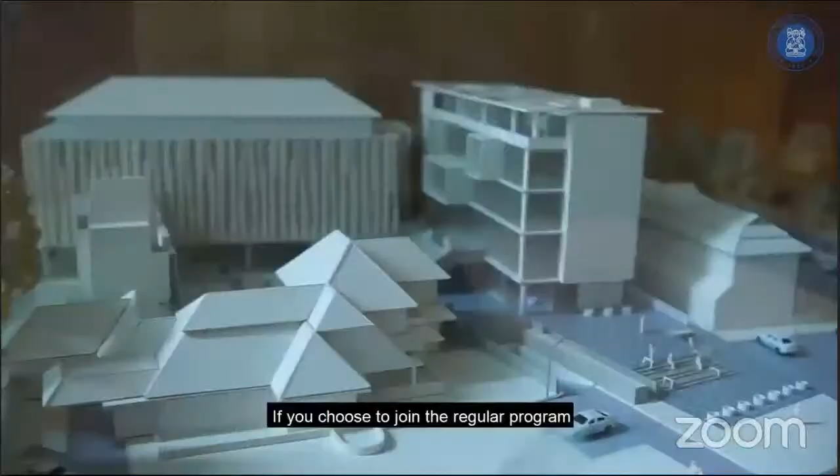Students can choose to join the regular program or the international program. If you choose the regular program, you will receive courses in Bahasa. You can also choose from six specialized programs, including regional development, urban planning, infrastructure and transportation systems, urban management, disaster planning and management, and innovation systems and smart cities.

If you are interested in joining the international program, you will receive courses in English. In the second year, you can choose to continue your studies at partner universities abroad through a double degree program, or continue your studies at ITB. We have collaborated with a number of world-class universities in various countries, such as the Netherlands, Japan, and the United States.

To support learning activities, we provide comfortable classrooms, library, multi-purpose halls, conference room, studios, and computer laboratory. Learning activities are carried out interactively through discussions, project works, and presentations, and are supported by events organized by the faculty, such as the International Joint Studio, international summer camps, student exchange, guest lectures, international conferences, workshops, and field trips.

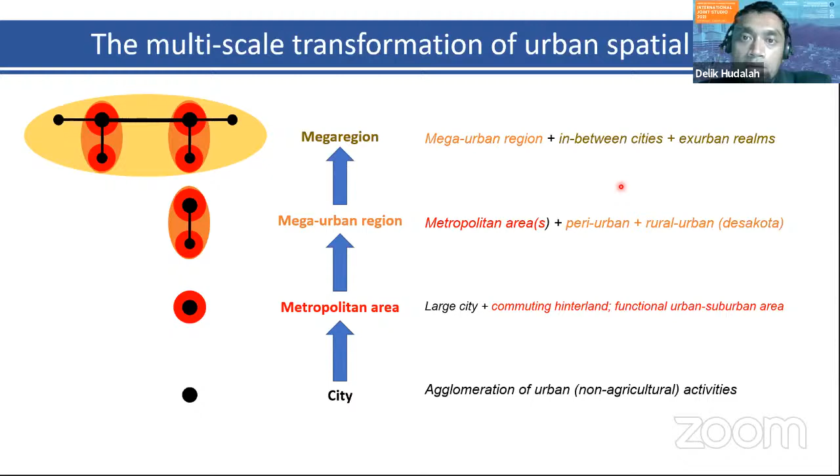In Germany, sometimes they call it Zwischenstadt, cities in between, or in some US context, it can be ex-urban realms, where new urban forms are really very much in no man's land, somewhere in nowhere. Urban transformation in surroundings which are nowhere, when compared to other urbanized locations, is very far away.

First, maybe trying to be... it seems like I have spent 15 minutes already, so I have to be rather quick.

For metropolitanization, we're talking about the city surrounded by the suburb, where the issue of satellite towns, large-scale residential estates were quite evident, along with some commuting issues and basic services. In terms of planning, basic services issues or inter-local government coordination were very much visible.

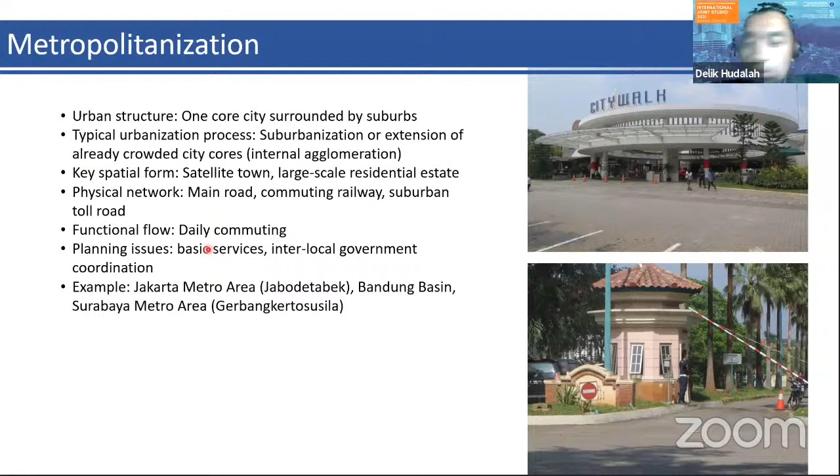While in mega urbanization, there has been a kind of unplanned mixture of agriculture and non-agricultural functions in some densely populated villages. It's like dealing with the mixture of agriculture and non-agricultural function, and some sprawling of industrial space, intercity railways, and quite a hot planning issue dealing with land use conversion in the fringe, and some issue of local economic decline or developmental issues.

And then coming into the mega regional issues, talking about mega regional transformation, it's quite an eclectic or complex process. Maybe it's kind of like chicken and egg, how mega regional space is becoming. But clearly there has to be some kind of global force and domestic forces.

For instance, some North American perspectives focus more on how the metropolitan networks are linked with each other through infrastructure interaction, so a more morphological dimension. And some cases in Europe focus on the relational dimension of intercity relations.

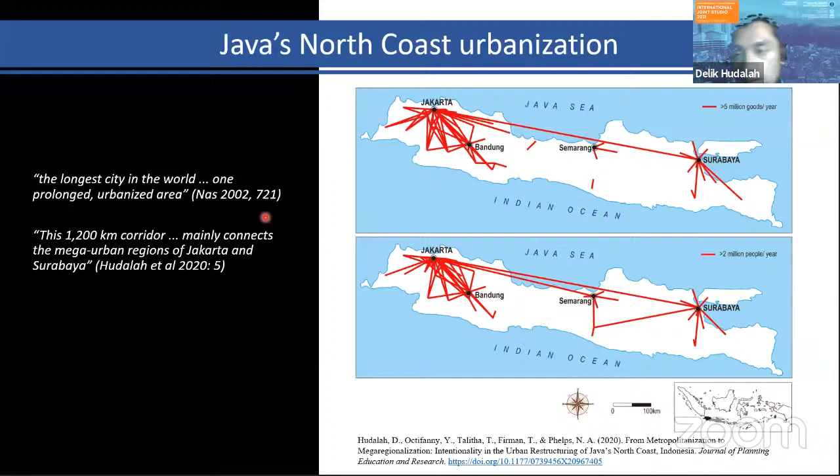I'm focusing on Java, where the most established urban spaces can be found in Indonesia. The North Coast, in some past studies, is considered to be the longest city in the world. So even before recent global competition, the North Coast of Java, or Pantura, is one of the longest cities in the world, a very long urbanized area of more than 1,000-kilometer corridor connecting the mega urban regions of Jakarta, Bandung, and Surabaya.

We also see that while this physical transformation can be tracked back through the colonial era, during the competition between colonial imperialism—the British, the Dutch, and others—regional infrastructure was considered a global security reason for defense. But now it's re-emerged that the transformation of this corridor also has to do with economic issues, including the competitiveness of the whole region.

And what the planning policy says about it is one of our focuses. We also see that while some phenomena are quite emergent features, there are some interventional factors behind them. What is interesting in the Indonesian context is if we compare it to a rather more strong state.

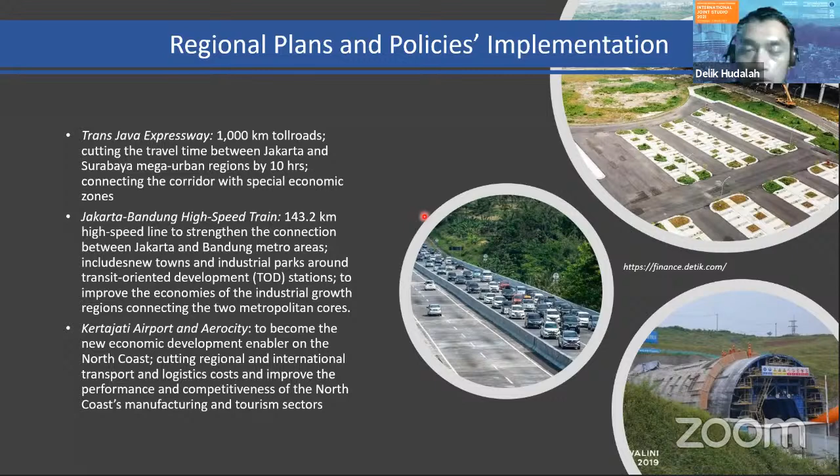Now we are also constructing the first high-speed train throughout the corridor. The first phase connects the neighboring metropolitans of Jakarta and Bandung, but from the ideas, discourse, and policy discussion perspective, it can or will span throughout the whole north coast until Surabaya. Also, some new transport hubs are being constructed beyond the peripheral areas of the large cities, in new locations, in empty space in some respect.

That is the new beginning of what we would see as a transformation of the urbanized island of Java, where all metropolitans or mega urban regions will be connected with each other, or are being connected.

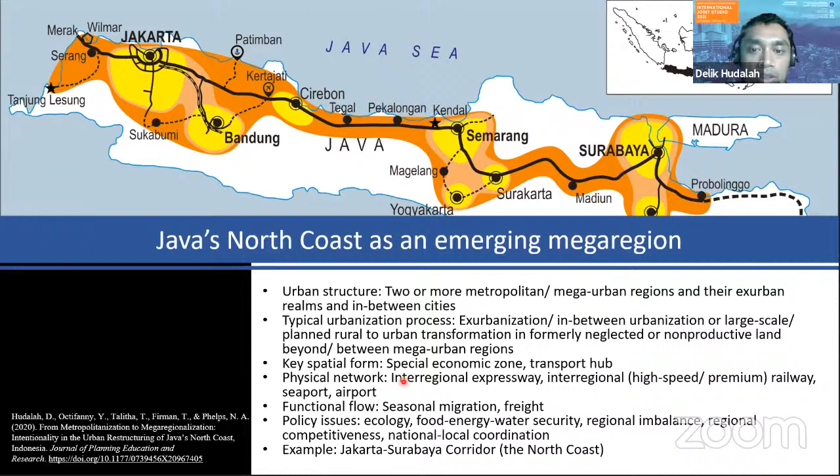The construction of transport hubs in new cities outside the traditional boundaries of mega urban regions is one of the emerging pieces of evidence that can be differentiated from before, along with some more specialized zones being constructed, and more freight issues rather than people mobility in some ways.

This is just maybe a beginning or preliminary study to see a new emerging phenomenon in Indonesia, with particular attention to Java.

Now we can draw some conclusions: there is an undoubted need to combine the spatial or physical environmental planning system with the sectoral or socioeconomic planning system.

It has been a lengthy race, in some ways, between these different policy fields, with periods where several policy systems were on the rise, and then later others took over. Now, in a period where physical planning is being questioned regarding its effectiveness in reshaping urban function, what is more important is the integration between these different policy systems.

We are also seeing that interlocal government and interlocal actor collaboration are not sufficient to really deal with the more complex and wider transformation of the urban area. And the central government is gaining importance.

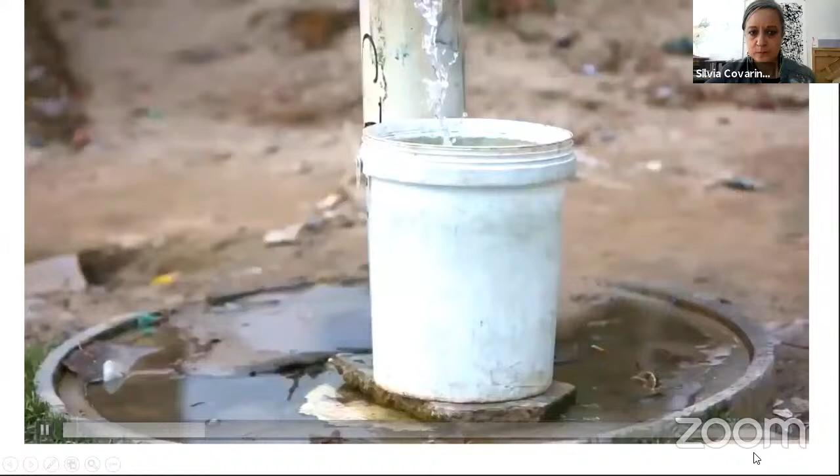We don't find toilets inside the informal settlements, so they have to use open fields or bushes, and that's where they get criminal attacks.

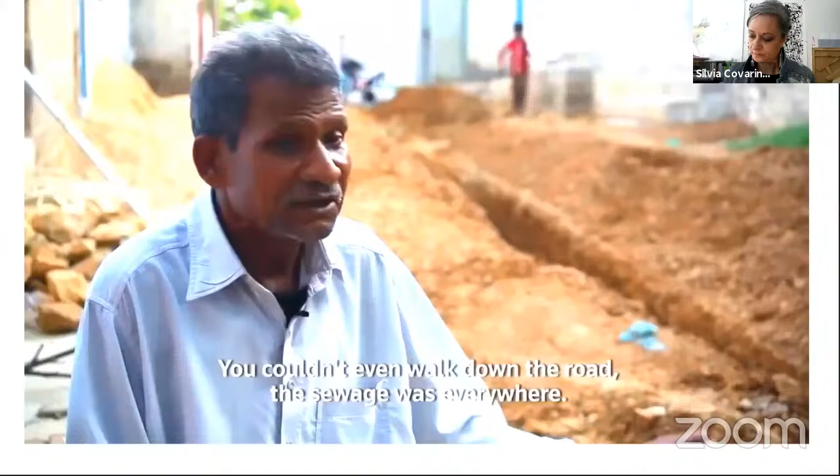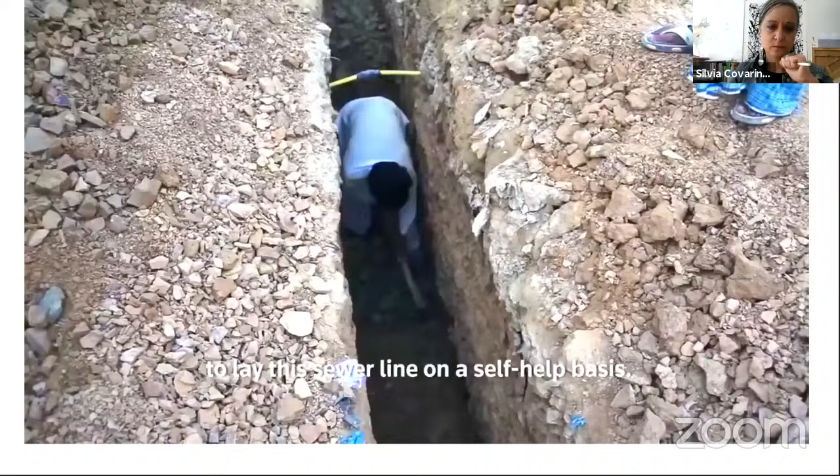The urban poor in our cities are the engines of the economies.

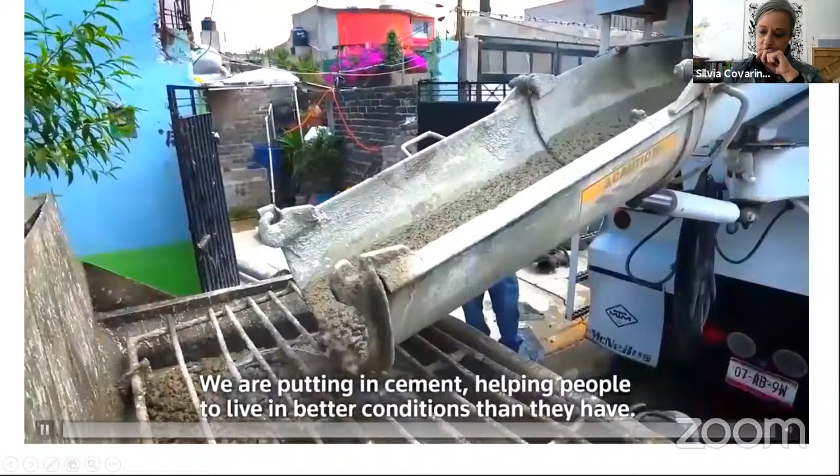This was the video we used at the beginning, because I forgot to tell you something.

The studio and the program to integrate the studio with housing come from a teaching group. We are working on four subjects - a studio at urban scale integrated with housing in four topics. In Cairo, one professor will work in a historical area, another in a new desert city, another in the middle of the desert.

My topic was to cover the general overview of the urban frame of Cairo and informality. This is why I decided to work a lot with the connection of global and local scale, to give the students an overview beyond the micro reality where we are working.

This is the video we used at the beginning to open the focus group with the students, and to coordinate the program of the two integrated courses, because housing research was behind the design proposal in the studio. The pattern of the density - let's continue to the global introduction - this is how we figure out the composition and organization of the settlement and urban form, behind how people are living there and the high concentration of people.

It's not only the form and the built form, but also the relationship with the natural environment, or with the topography, with the natural elements of the city.

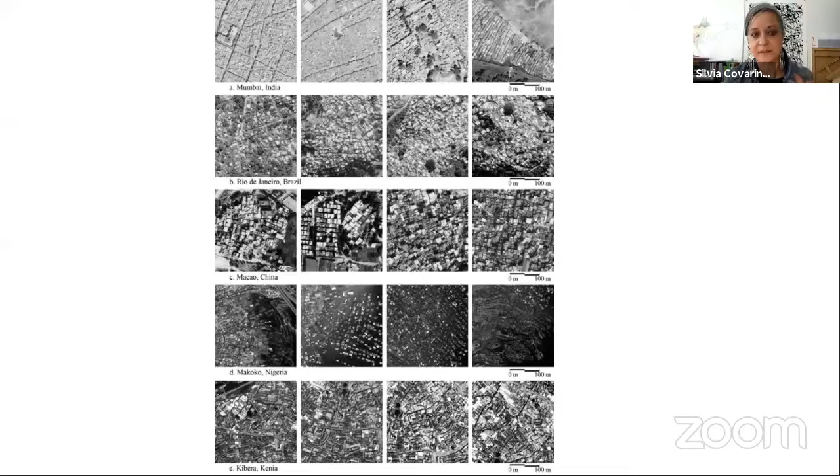Behind this urban analysis and physical understanding of form, there is a broader community - people living there - and there's an invisible urban living as a topic, because by simple definition, a slum refers to an informal settlement in an urban area that is very densely populated.

This is the classical portrait of the living condition: the problems in the habitat, the low condition, the problems in infrastructure - especially basic services for the community - and the social right of people to live in a very good condition.

This is a quote, a motto so to speak: 'if you've seen one city slum, you've seen them all.' But it's not true, because each reality has a different connection with the particular context where it sits, and the community is always unique.

We start to work with the students using an approach based on keywords and visual perception. Through keywords like service, hygienic condition, and transportation, we open up the global scale to them, and we ask them to submit a certain number of photos to work with through images.

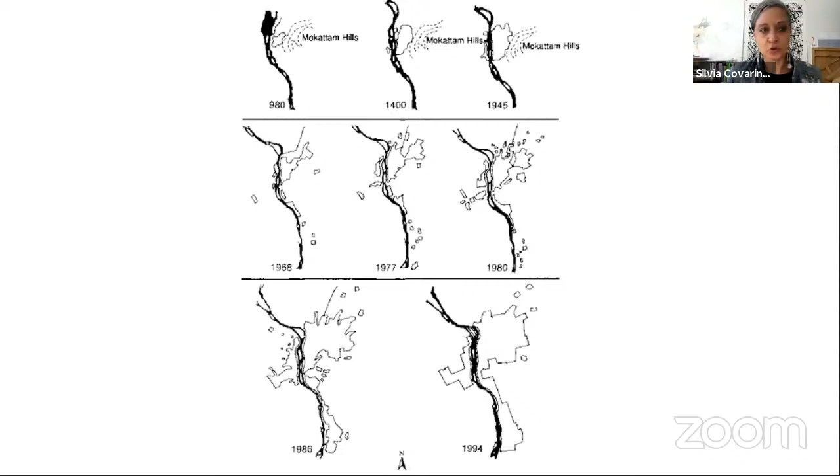Looking through recent time, the built-up area of Cairo, with some overlapping from 1950 shown against the gray layer of the current situation, shows the impressive, aggressive increase of the gray area over the last 40 years, and the vision for the future.

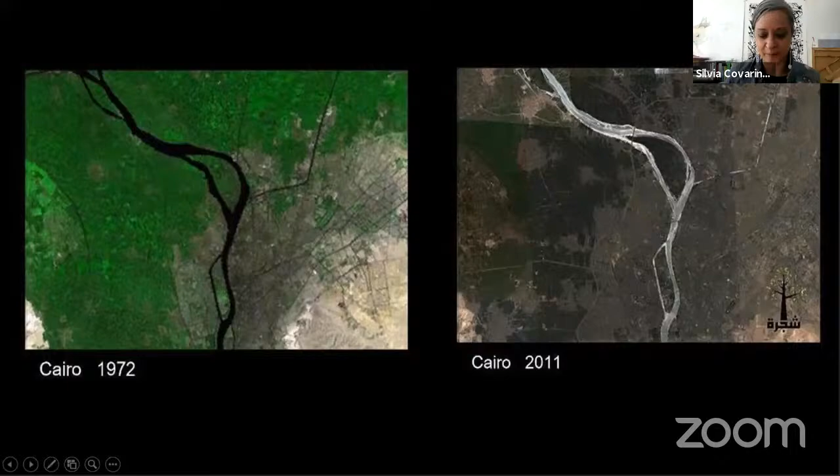The presentation from my colleague before, Professor Delik Udala, sorry for my pronunciation, really impressed me through this study of the connection and discussion of the very large regional planning, because basically here in Cairo we are facing the new capital.

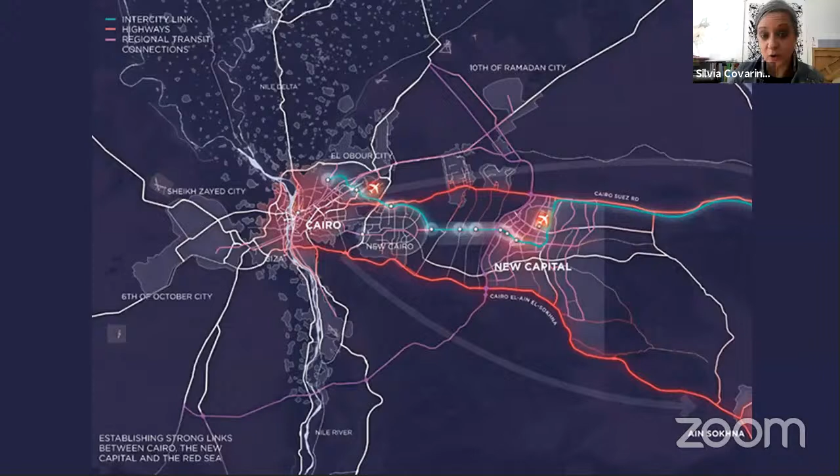We had New Cairo and the issue of the desert city, and now we are moving to the new capital, and it's a very similar thinking and vision for the future.

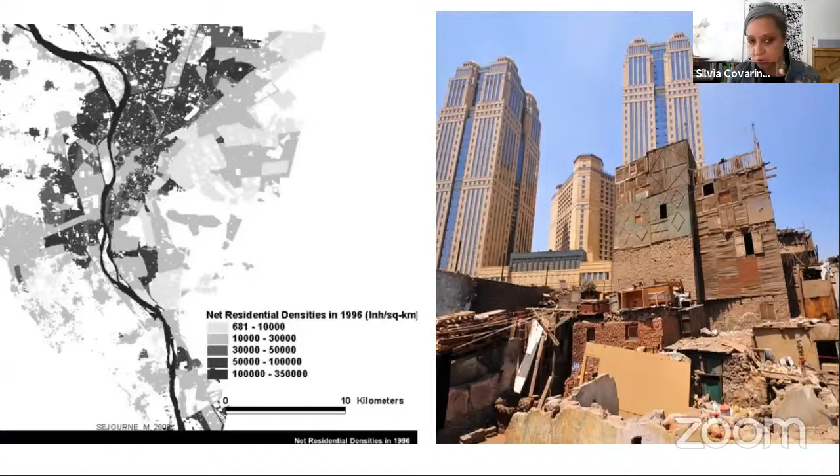As I mentioned through this study, around 70% of the inhabitants of Greater Cairo are in informal settlements. As I mentioned before, this uncertain data is an issue to contain and manage.

To figure out the portrait of this area, there are more or less three important components: the former desert land as the newly developed city, the historic core of the city where several settlements exist in historical Cairo, and the urban pockets running around the development of such housing programs.

A very good reference is this study from GIZ published in 2009, which provides a good background to understand the development and increase of this dynamic, with certain data through maps and experience to consider. And this is the core of Cairo.

There is some data regarding the issue of housing, how it's running, and the scenario in Egypt about the construction of housing units by sector. This data covers a 10-year period.

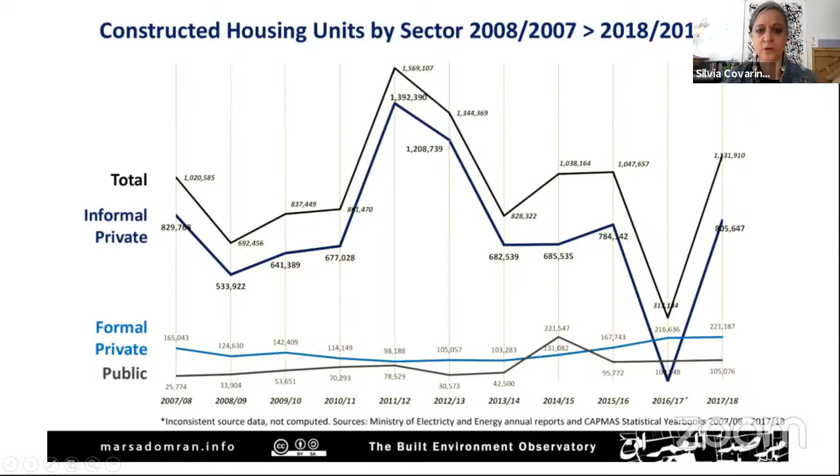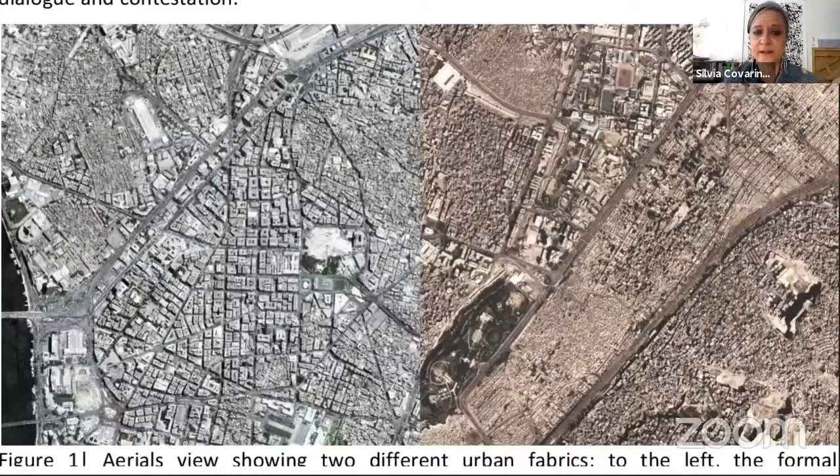The reality of the chain of the city, the public space, the informality in terms of the micro-economy too. This is a picture from the city, a very interesting context behind the border of our site, and the temporary and mobile informality in street life.

This is a brief summary of the garbage city, Manshiyat Naser, the area and surroundings where we work with our students. We are located behind the Mokattam Hill on the border of historic Cairo, very close to this important slum and a very large cemetery area.

The dynamic is more or less the same: it attracted people through the large movement of immigration from rural to urban areas. This is related particularly to the issue of recycling, and the micro-economy is there because of the connection with the Zabaleen, the garbage collectors. This is why it's called the garbage city.

This is an overview from half a century ago of the area and the hill, then the first development, the initial built area, the aqueduct, and an amazing landmark of Mamluk architecture in the area behind. This is now an overview of the citadel, and the City of the Dead with a nice element of Mamluk architecture, the first developed hill, and the area behind it.

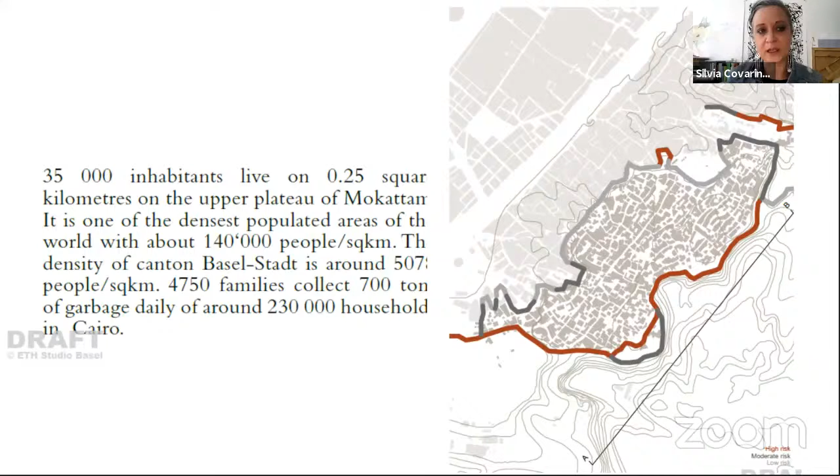This is a map of the risk of the area. The red line shows the very high risk related to the aggressive construction behind the hill. Unfortunately, in 2008 a huge disaster happened, and many people died. This combination of risk is very important to consider.

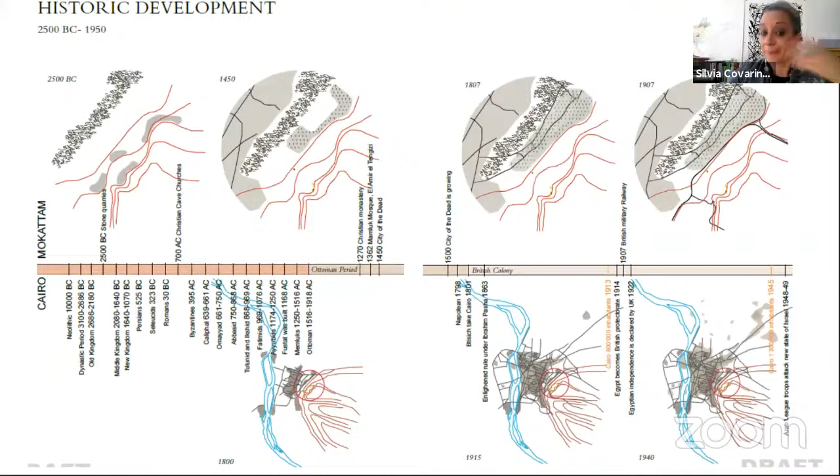This is the historic development of the area through time and how the urban growth happened. This is a kind of plan and intervention from the government, part of the 2050 plan, but it has not been realized yet.

More data, more reference about the area, how we are going to read and understand it: the combination and the border, the topic of infrastructure, the story of Cairo, the topics of risk and the marginal border with the topography, more and more close, the urban texture behind, how the different areas work, the impact of the autostrada, and the aggressive infrastructure there.

The special relationship with the hills, because there is an important heritage to consider. This church in the cave is a quite unique and interesting element in Cairo. And how is this relationship with the natural element too?

Such services are there in the area. I try to translate for you from the Arabic: the church, the housing, the environmental institution, the Sunday market, the entrance. It's very well connected with the autostrada and the surrounding area. The impact with the topography, the reality of the informality in the Sunday market, the condition of the built environment there, the reality inside the little void in the informal city.

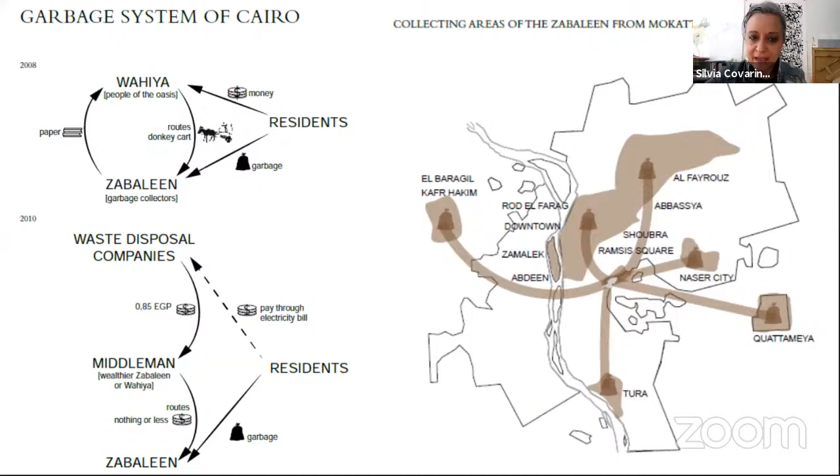It's such a really important dynamic behind the way they are working and living in the same area. And now, how the housing typologies work was very interesting for our students to think about - how in the same physical space they are living and working.

How is the dynamic of the building? How is the dynamic in the street? And by the time - this is a very interesting study we found ready, by the way, it was very useful for us and also for the students to think about the proposal - how this relationship works with the street space and inside the building, and the circuit through different times, because it's a very active and dynamic community there.

Of course, the garbage city is a very interesting case. It's a unique slum, let's say slum or shantytown, however we would like to call it. And it's interesting for anthropologists, it's interesting for photographers.

It was the site of a public art project, a very famous set of murals, to give visibility to them, and this included the participation of the community. It's also very interesting for the sociologist and for the photographer.

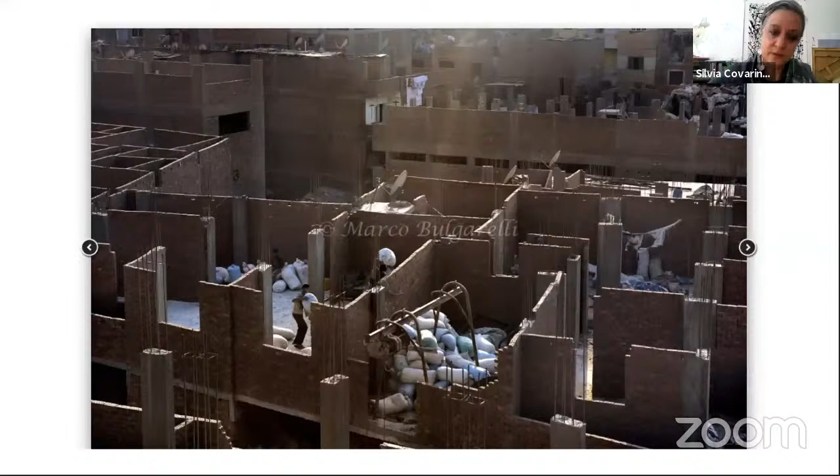This is a very interesting work from Marco Bulgarelli, and I picked some interesting photos. It was looking really inside their life, and showing the huge impact - the environmental impact of living with this garbage and the contamination in the street, a very dirty place, by the way, and a very high risk for the health of the community.

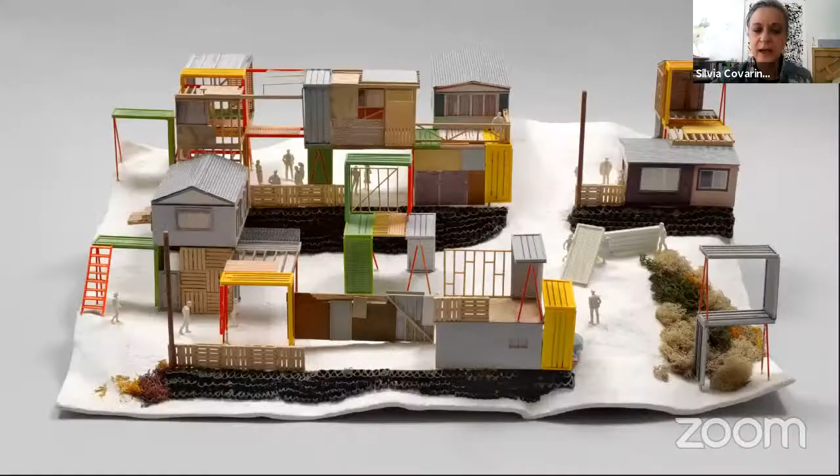Well, what we did with the students was our approach, a design and research approach to reading informality. First of all, we focused on designing for people - as designers, in love with form and with the plan, but we tried to really highlight the social aspect, and consider sustainable design, participatory design, sustainable architecture, and maybe self-sufficient solutions for them.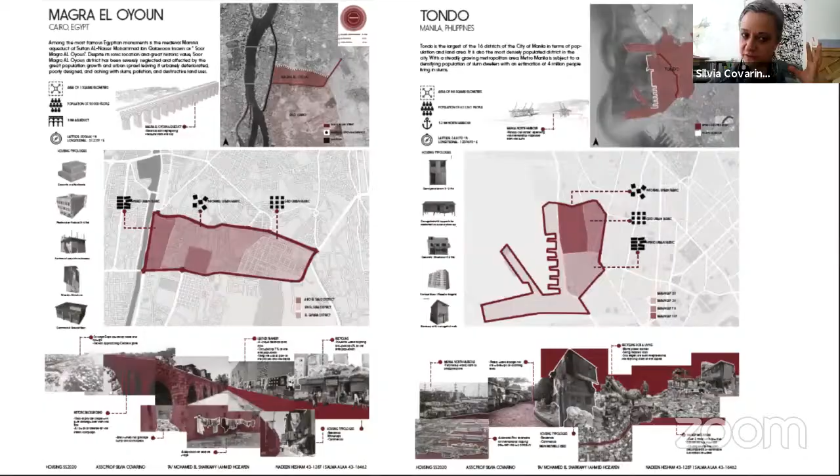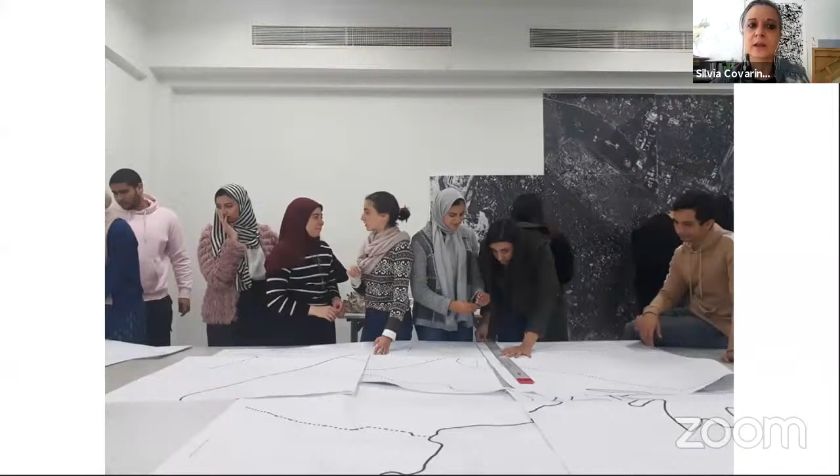Then we went through the urban analysis, using the impact of the first video presented in the lecture today, and visual perception and mapping. We tried to work with a cognitive map. We prepared the students with a large map, taking careful consideration of the border and surrounding area. We also worked with the model, in progress. Then we gave them a task to work with keywords and images.

This is the result that came out from them at the beginning, as an impact and impression after the visit. For them, of course, it was the first time to visit the area. We prepared the visit, going there with my TA a couple of times to prepare all the routes and the map, and tried to connect with some locals and facilitators of the community. This is how the reflection of the students over the impact of the visual experience there came out.

And then we worked through the map. It was very interesting, the interaction also with the community, very friendly, very nice with us. This is the summary of the urban analysis, the environmental aspect.

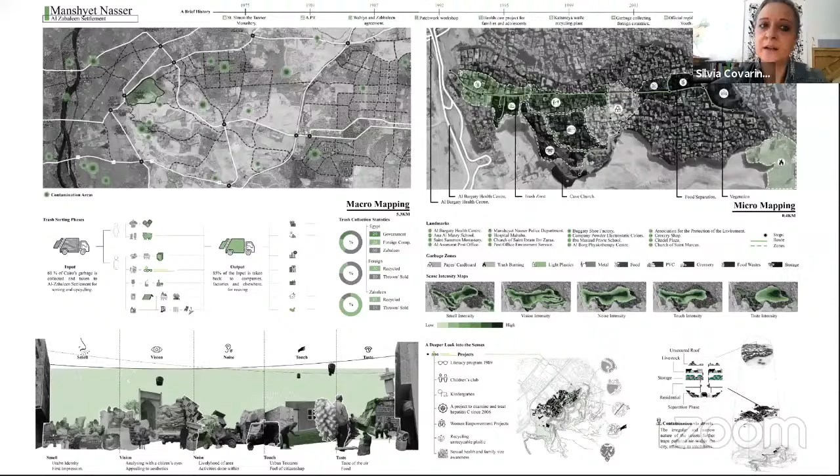The social aspect, how the community works, how is the connection inside the settlement and behind the border in the district, and also with the city, and the economical aspect and the social issue. This is an amazing section my student developed, showing the interaction and impact with the network of the city. Then we came out through the keywords to figure out the problem, in three important aspects.

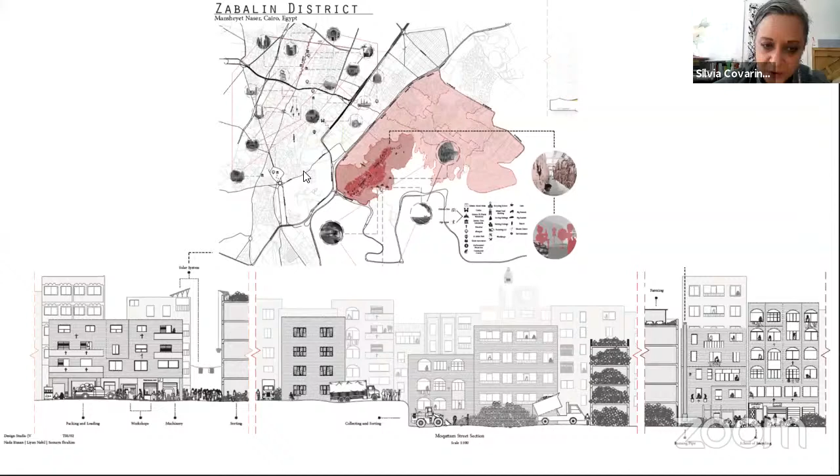Social, environmental, and economical. It was a very active focus group and active section there.

I think so. There is one video... I missed one very short video. I don't know where it is. I think so.

And this is the summary of how the preparation for the master plan and design proposal came out. We came out with several topics and subtopics. Now I will leave the space to my teaching assistant to show you quickly the final result of our studio. I hope it was clear. Thank you so much.

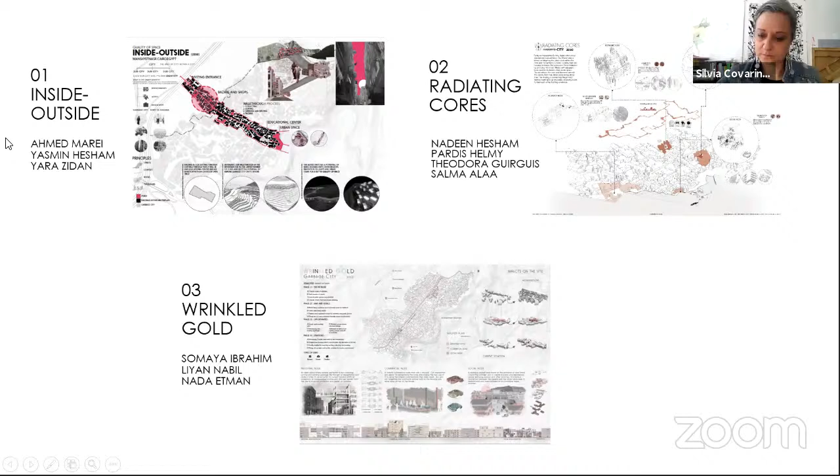Okay, now we're going to start with the first project, called Inside-Outside. The main concept of the project was to create several axes throughout the area of Manshiyet Nasser, in order to facilitate and create several access points and connections between the surroundings, the city itself, and the area of Manshiyet Nasser, in order to create several networks with the city.

The first thing is generating activity throughout the axes themselves, generating different activities and different qualities within the axis, leading to an open space at the end, in order to encourage people from outside to enter and work together with the people of Manshiyet Nasser and the informal settlements.

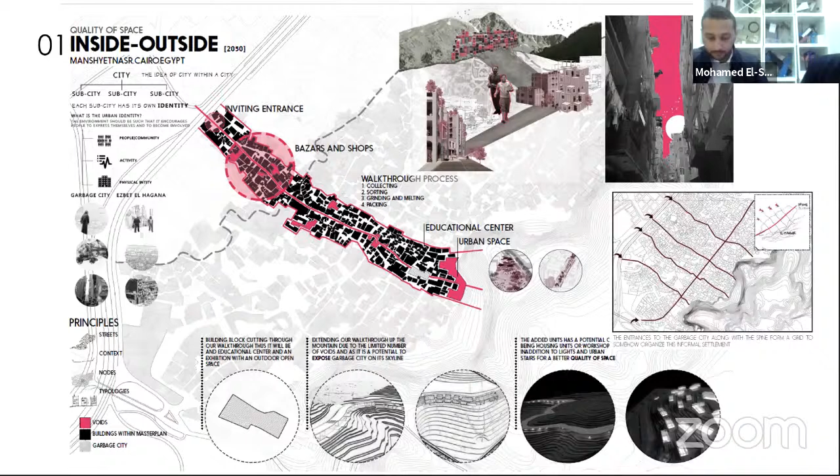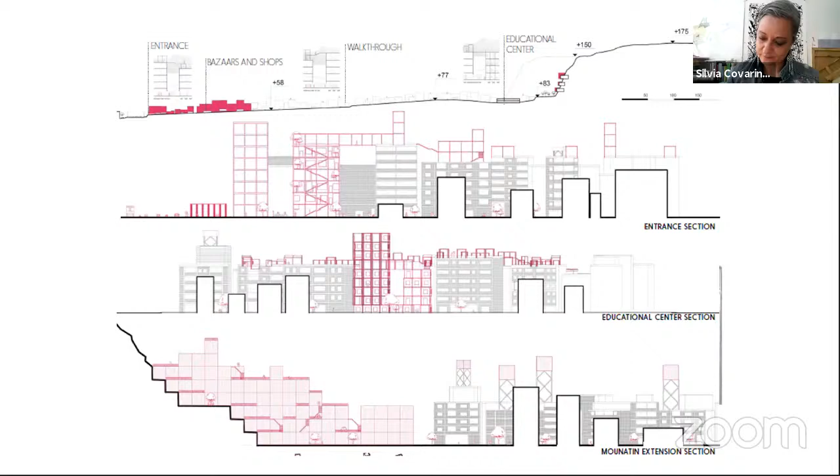We're going to elaborate on the different projects and the students' work. First, that's a section showcasing how the students worked within the area, starting with the entrance and the shops as a way to attract people into Manshiyet Nasser, then a walk throughout the informal area to showcase the process of garbage collection and garbage sorting. It ends with an expansion on the mountain itself, because the mountain was always a barrier that discouraged people from expanding. We're going to start with the first project.

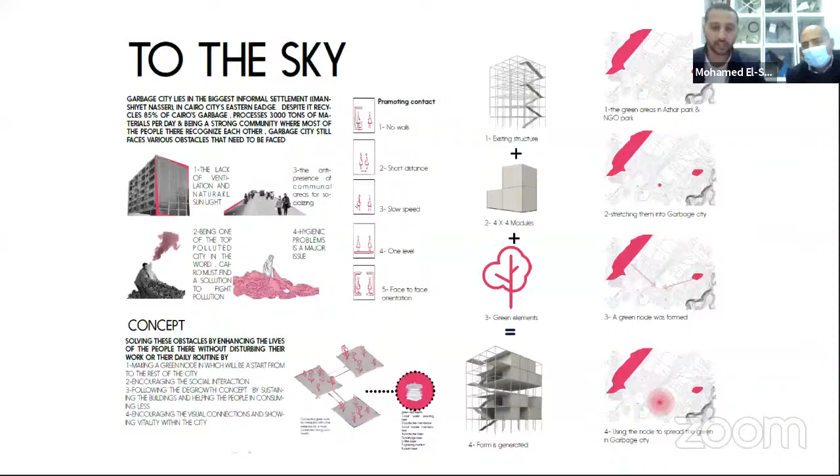The first project was called To the Sky. It includes the student who was mainly focusing on creating new typologies of housing through a modular system, in order to create a new way of living or working within the area. First, as you can see, he's working on the entrance of the area itself, and working on the voids and spaces where he thought he could create the new typology.

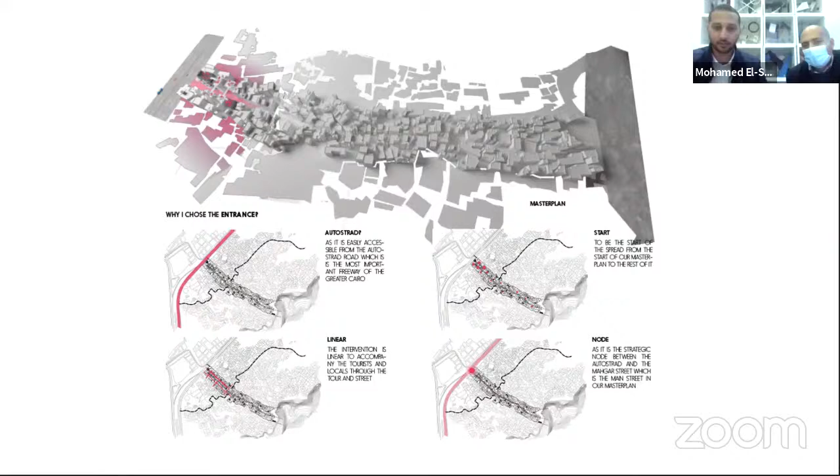As you can see, he first analyzed the area to create a zoning system and understand how the area works. Then he applied his concept, which is creating the modular system and new typology of residential spaces. He is saying that the typology or modular system he is creating can serve different activities - it can act as a storage unit, communal spaces, vegetation, or even as a residential area or housing for the people of the area itself.

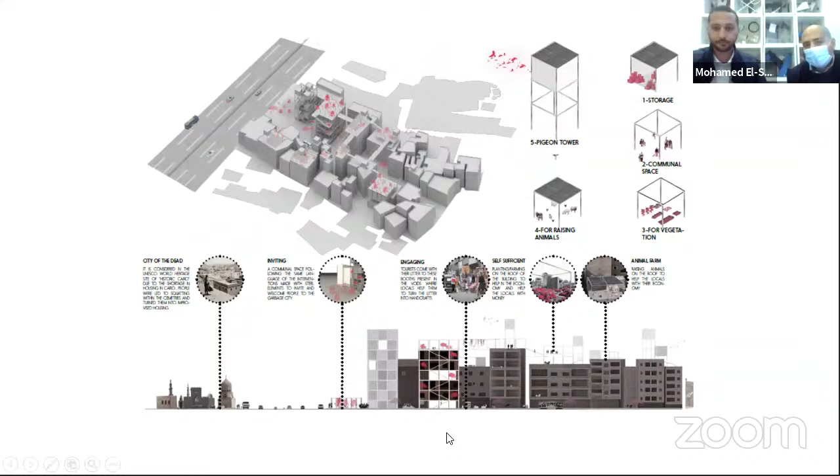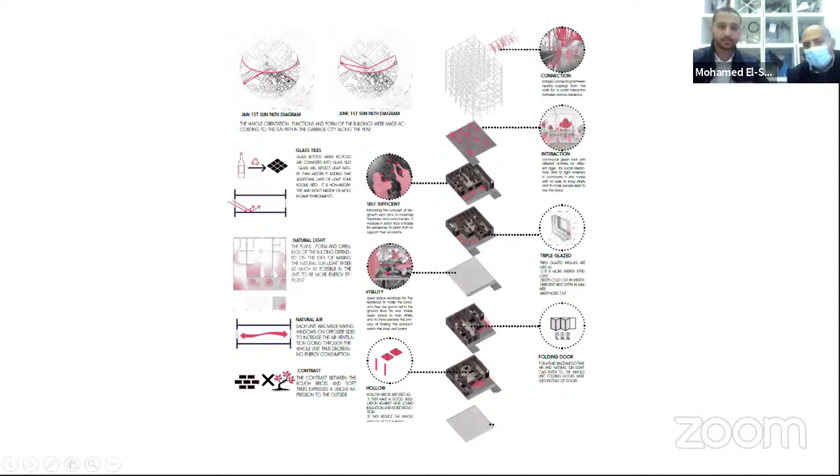As you can see here, he is trying to showcase how the housing units will work. It ends with a shot showing how the typology is going to work with the already existing situation.

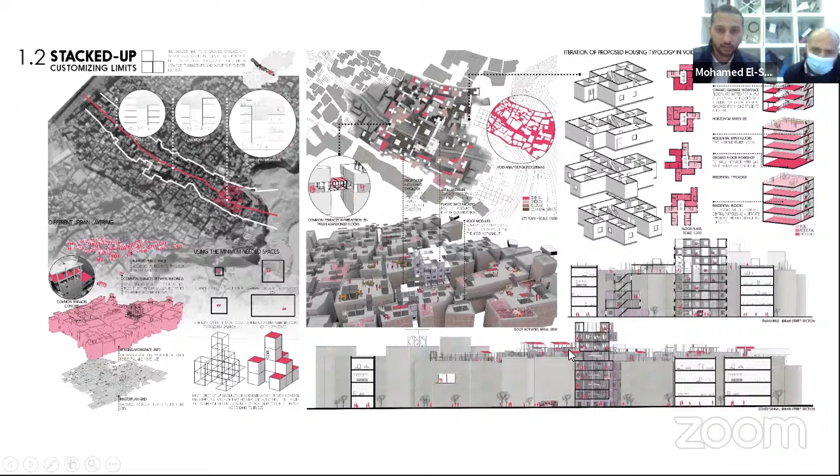For the second project, it's called Stacked Up. The student was working on the already existing spaces and how she would develop the area without demolishing or removing anything, but rather adding her modular system to the already existing areas or spaces. So she is here analyzing the housing system of the area itself, and then trying to show us how the modular addition will work throughout the area, on the roofs, and within the open spaces.

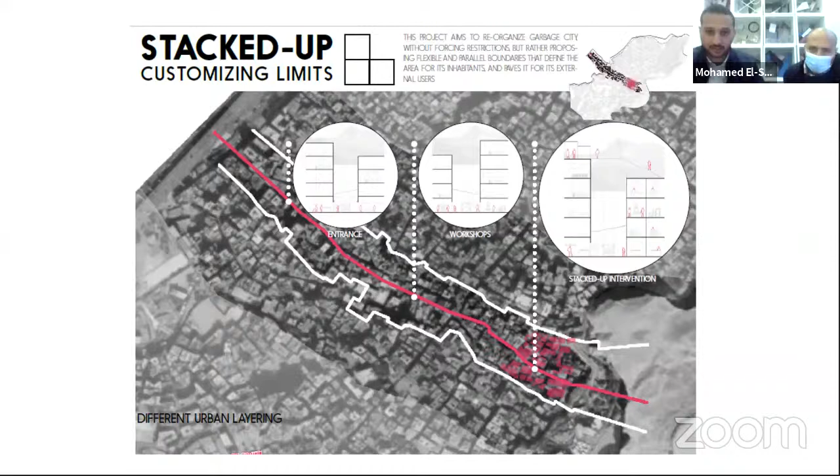It showcases how the workshops - the layer she added - would work on the ground floor as workshops for the people visiting the informal settlements. How would they sell their stuff, how would they sort the garbage, and how would they work within the area itself. And how she is showcasing how the core and the spaces will be applied together within the area.

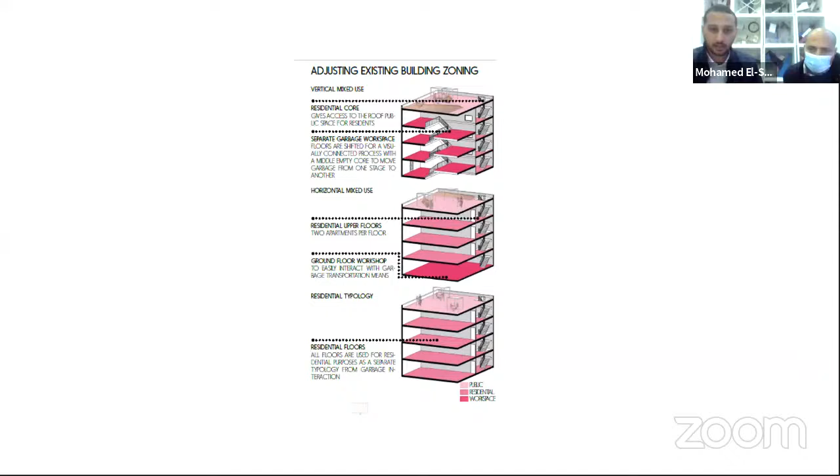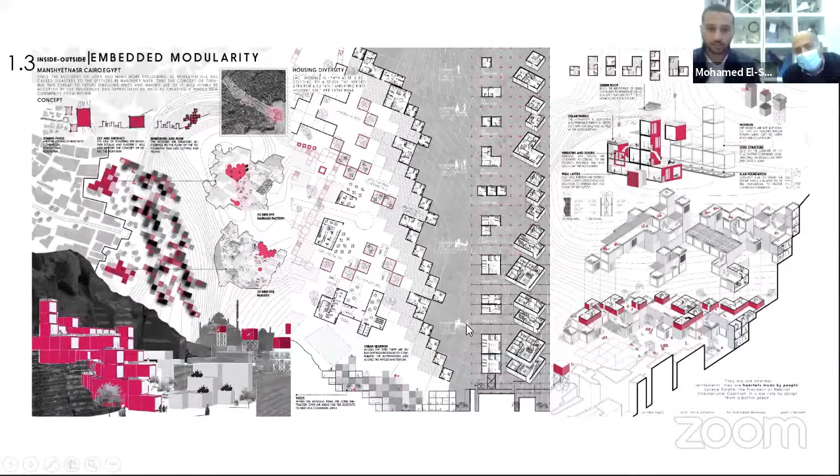The third design was a very interesting end to the project itself. The student was actually trying to experiment with how this modular system could create new possibilities of expansion within the area. She was trying to treat the mountain as part of the design process rather than as a boundary, creating different qualities and approaches to the design. So she created a modular or grid system to add her modular system and create a better living situation or environment for the people in Manshiyet Nasser, the informal settlements.

Here you can see how she created different analyses or systems on the modular - how it can work, how the stacking up of the model can work with the area. Here is one of the analyses of the modular system, the structure and how people are going to live, and how she could add different additions or different qualities to the area.

And that's it for the first design proposal.

The second design proposal was also very interesting because they were trying a different focus or different design proposal for the area itself. Rather than creating an axis, they analyzed the area, and based on their analysis, they chose different urban voids and connected them in order to revitalize the informal settlements, or the area of Manshiyat Nasser.

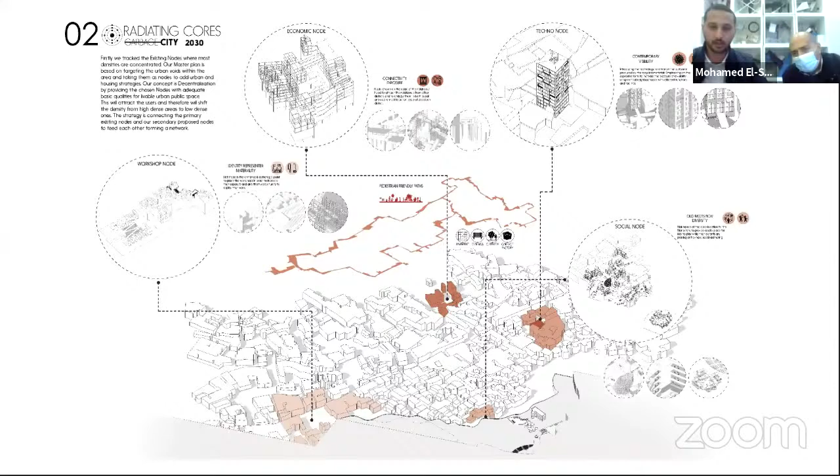They were targeting creating more livable and socially integrative public spaces, creating a network connecting these nodes together into better quality of life for the people. Each node targeted a different and specific character or role within the design proposal, varying from workshop node, economical node, techno node, and social node. They all work together into creating a better living situation.

The first project was a light tower. The student was trying to experiment with how she would create a vertical tower within the area of Manshiyat Nasser that can create a new skyline, a new and multifunctional vertical complex with a contrast to the reality of the area, creating an iconic and expressive quality within Manshiyat Nasser that can help in providing for the surroundings.

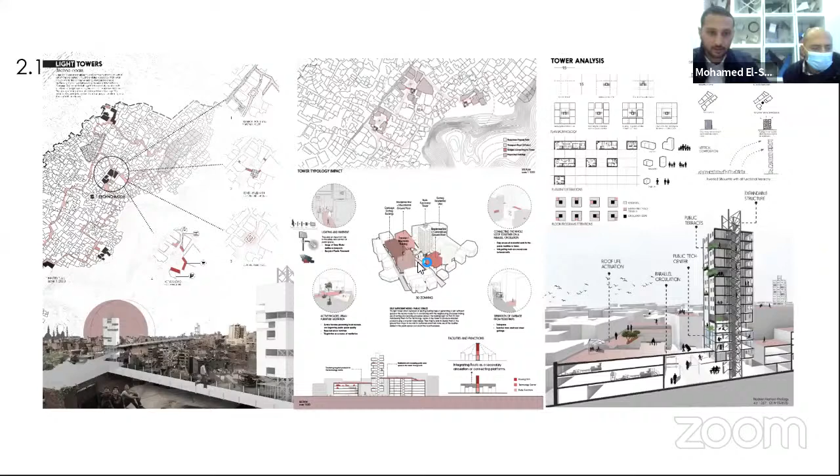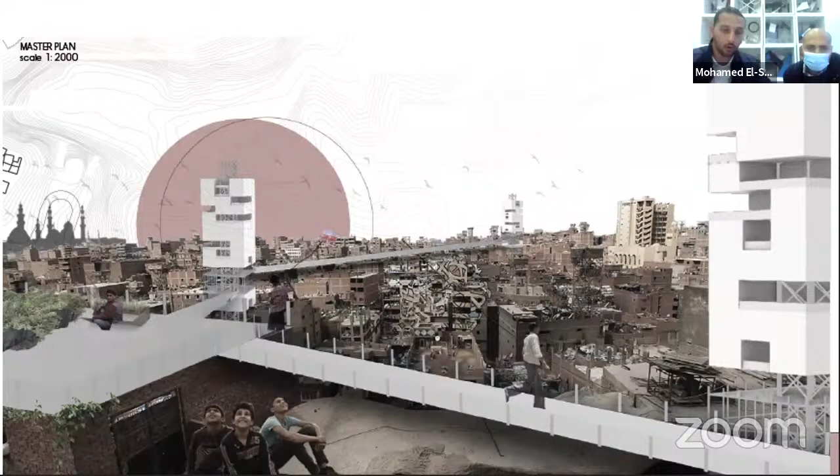The main idea of the complex, or the node, or the tower itself, was to have a city within the city, with different qualities and different activities working within the tower and supporting the surroundings of the area.

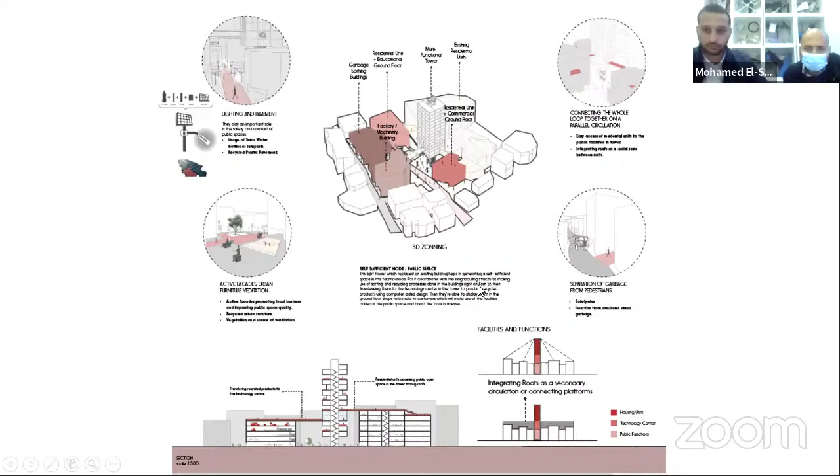Here you can see how the skyline would change or be affected by the tower, and how the tower can actually support all the surrounding elements around it, creating a different attraction point towards the people. You can see also how she worked the different levels of the tower, and that's it.

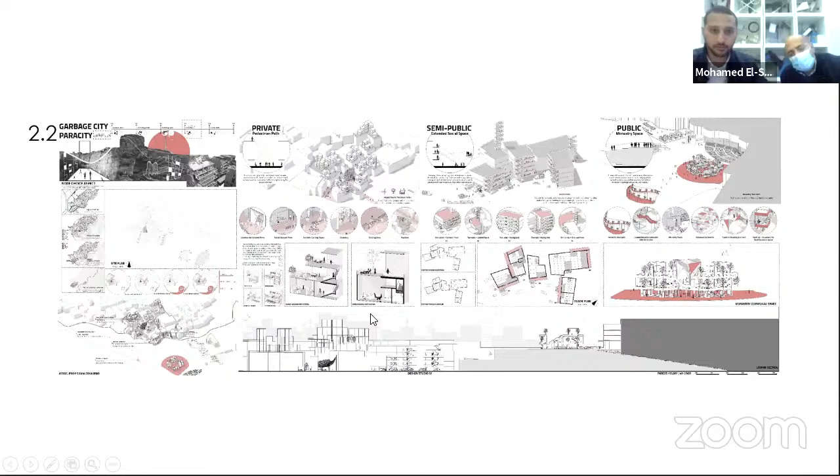The second project was very interesting because the student tackled the open spaces and public urban voids of the area itself. She worked from the private realm within the housing towards the church. The church was a really iconic part of Manshiyat Nasser—most visitors know Manshiyat Nasser by the church itself. So she wanted to integrate the public space from the private area of the housing towards the church as a public entity, in order to give a new perspective for the people.

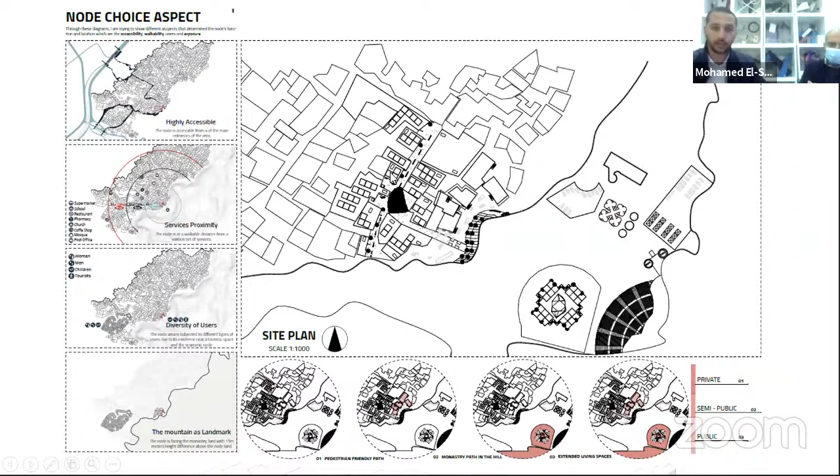Here you can see she's working with the private space, or private housing area, going with this kind of iconic pavilion within the private area in order to help people create more activities and kind of an economic state for the area, towards the church as the monastery space, as a communal space, in order to connect people with different backgrounds together.

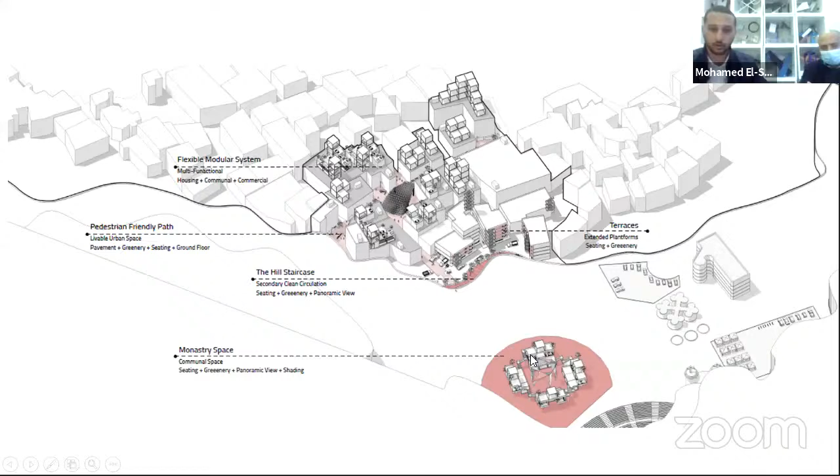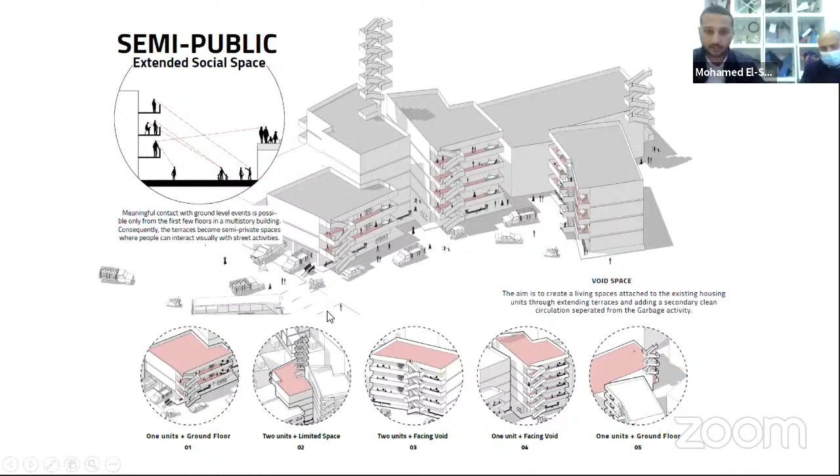As you can see, that's the sections, plans, and 3Ds of the area, showcasing how the rooftops can act as a public realm or communal space for the area, and how she's trying to connect people from the residential to the public space in order to integrate people together more and help in the work process. And here, how the communal space will integrate towards the monastery, or the church, the iconic church itself.

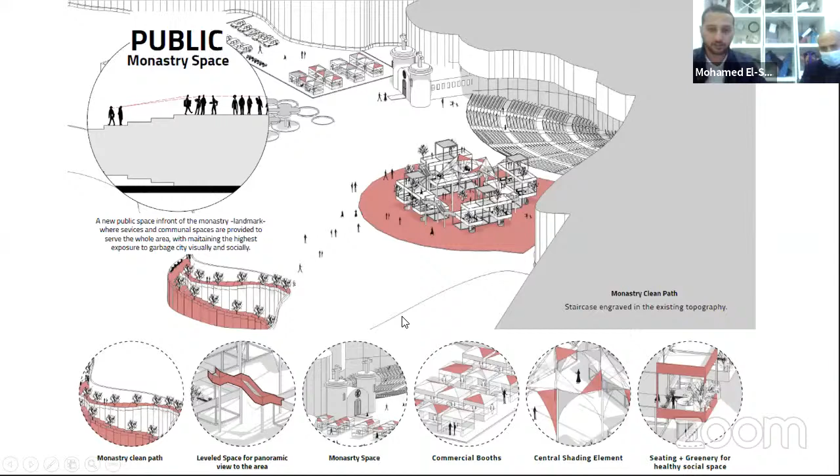And last but not least, the economic node. The third student was working in order to facilitate or create better economical hubs for the people in Manshiyat Nasser, to enhance their economic state and provide them with spaces where they can showcase their work and the elements they're working with.

Throughout the garbage collection, she focused on two parts. First, the garbage collection process, because 90% of the people there are working on garbage collection, and how it's integrated with the housing and the living situation of the people. Secondly, how the ground floor activities will work.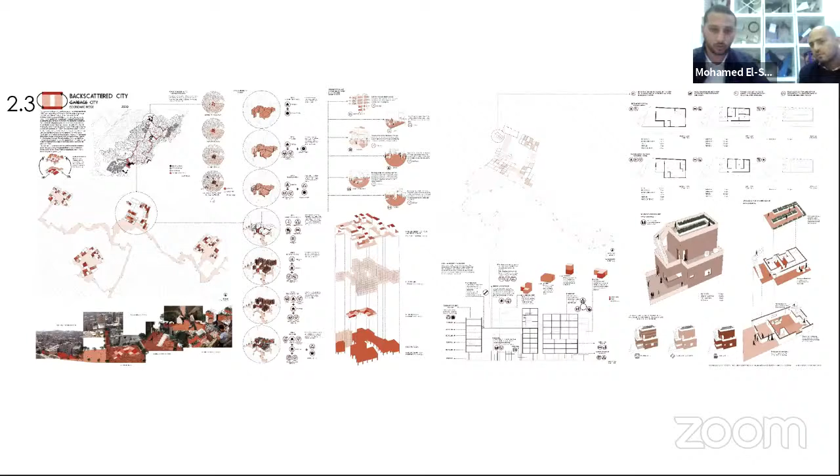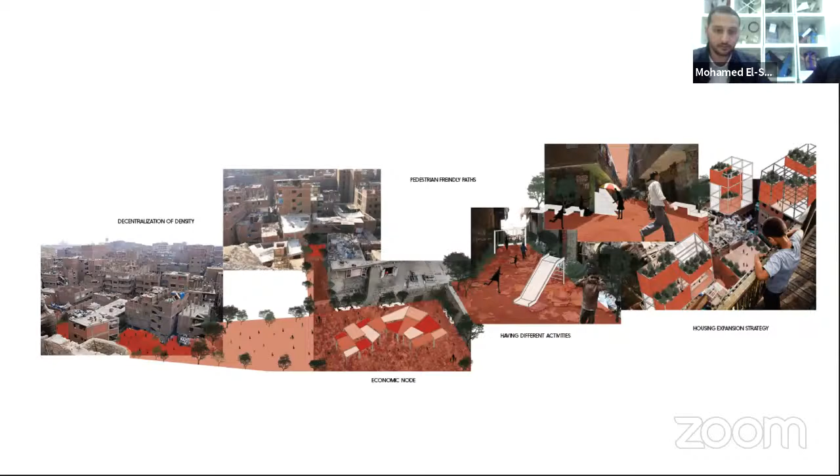So she's showcasing how she's creating a spine throughout the whole area. This spine can connect to the ground floor and connect the activities of the people. And she's showcasing finally how the garbage collection and sorting process will work within these urban voids, and how people will interact within the activities of the spaces themselves.

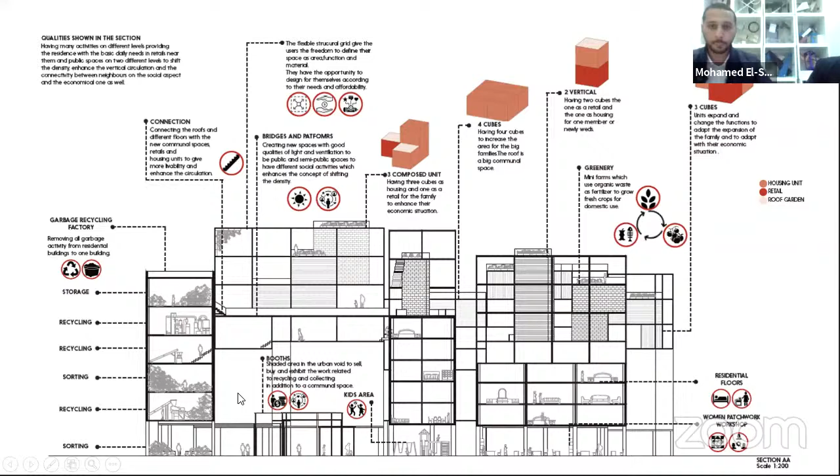Here you can see the complex, how the residential will work with the garbage collection process and ground floor activities. And here she's showcasing how the complex will work from the inside with the residential and also the garbage collection process. Thank you.

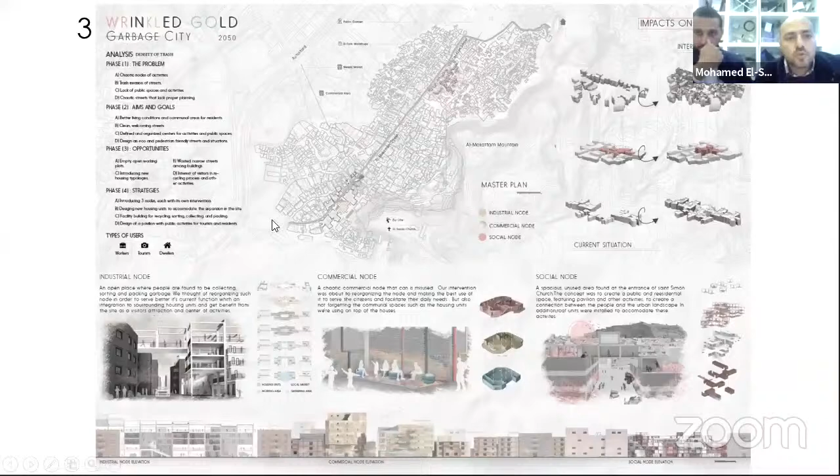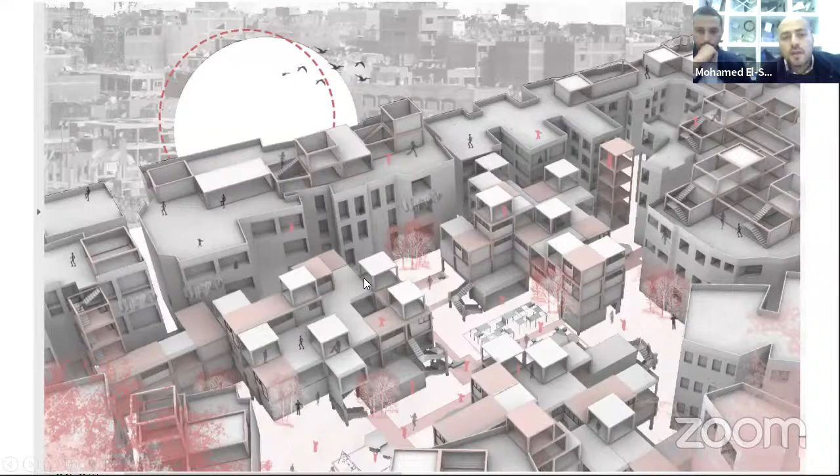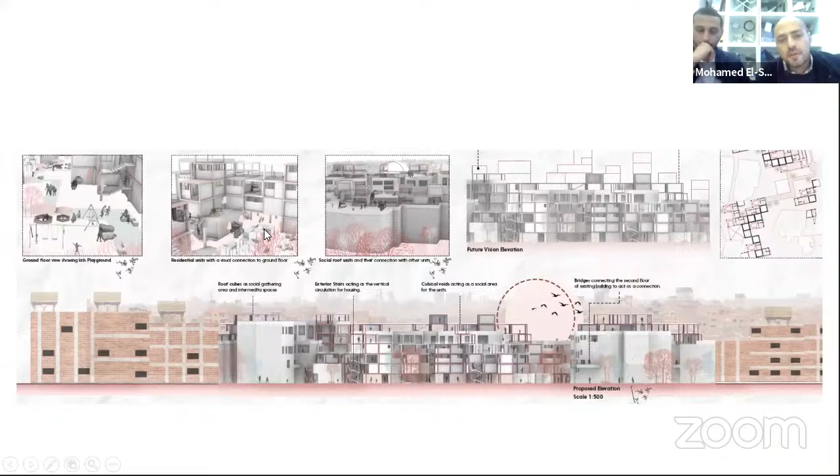So for the first one, the social node, it works with the existing building, and shows how they added on the rooftops the idea of modularity that the other groups also worked on. Here you can see how they worked on the rooftops and connected the public space on the ground floor with the different roofs using stairs, bridges, connecting existing buildings with new structure, using the same modular design. As you can see, the ground floor is mainly reserved for playgrounds and workshops, the middle is mainly residential, and the top is reserved and made for people, acting as a social node. So it's social on the ground and social on the roof, and residential in the middle. This is the main idea of the project.

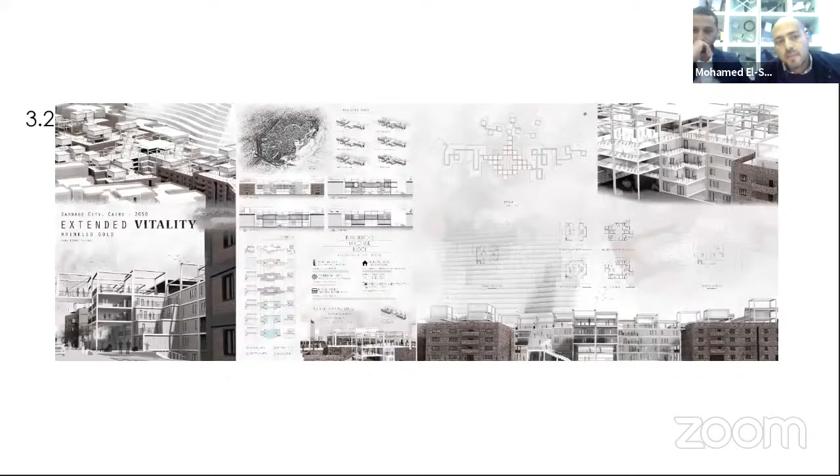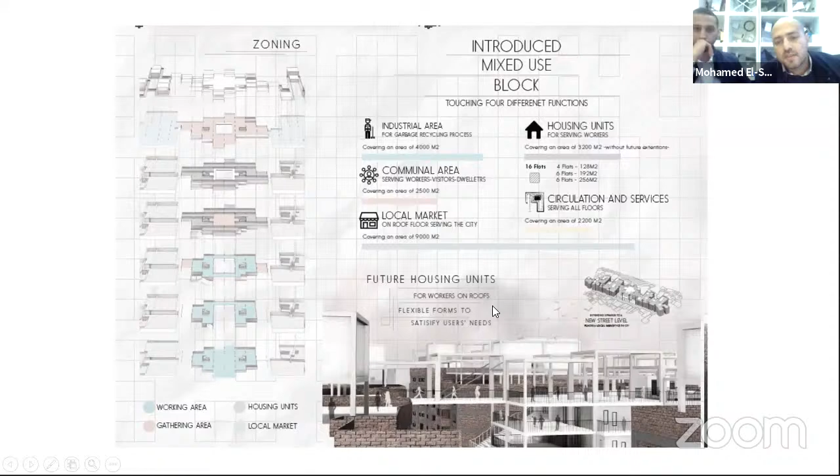Second one, extended vitality. This is the mega structure for the industrial node. It's all about one big building that holds everything, and it also extends to the roofs of the surrounding buildings, as you can see here. So we have the working area, the gathering area, and housing units all within the same building. This section shows how this building is actually located within two existing ones, and how the skyline still has the same continuity, so you can't actually tell what is new and what's existing and old.

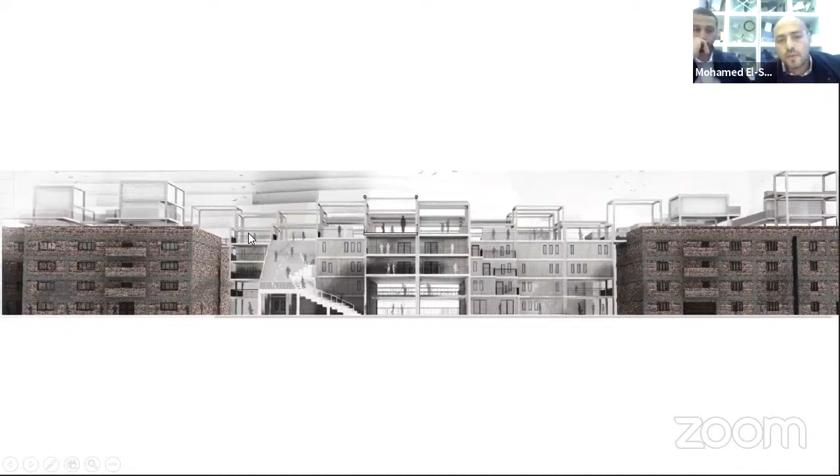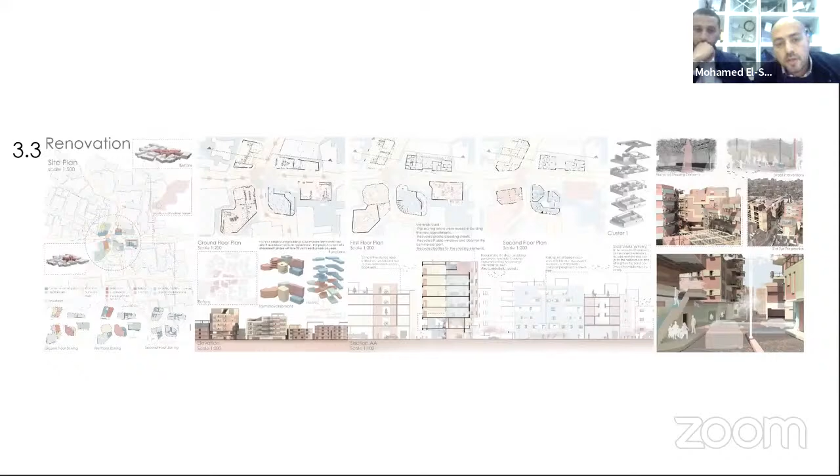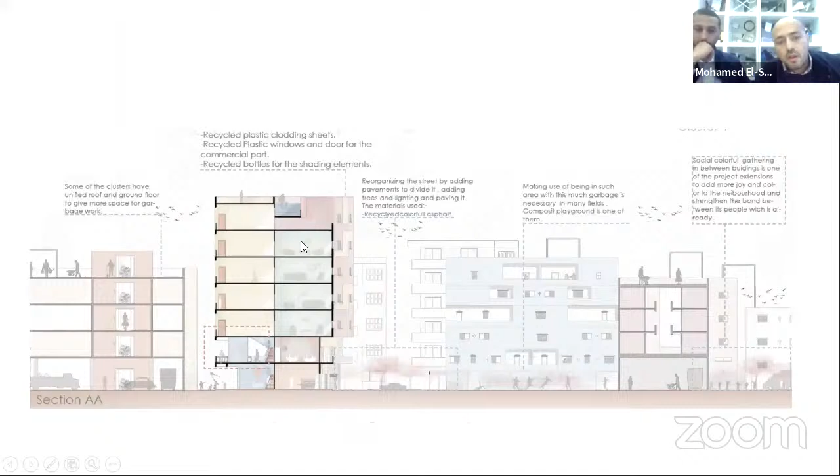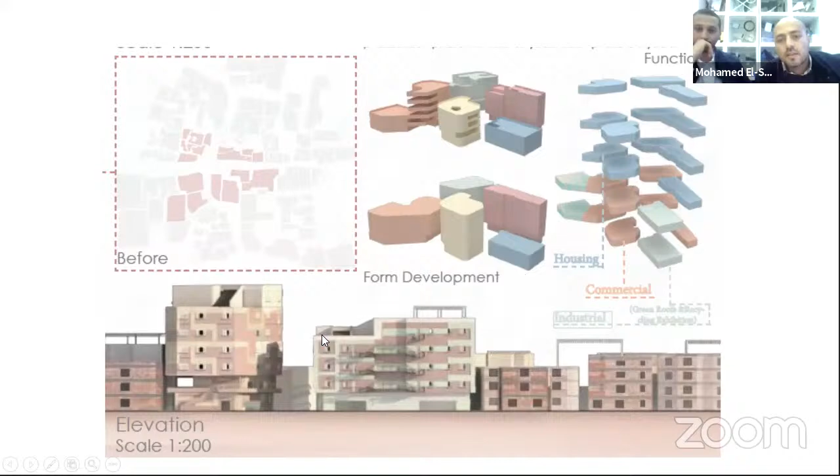The third project, I think, is the only one that didn't add much to the existing structure, but rather worked within the same envelope. They tried to generate new activities and commercial workshops, social and residential activities within the old envelope of the existing buildings. As you can see, these old buildings already existed, and they just tried to create different activities, like educational and industrial. So before, it had only one use, and then they created different uses between housing, commercial, and industrial. This is how they imagine the project would be. And that's it, thank you.

Is that all finished, Sylvia? Yeah, sorry, they took this presentation very seriously. I'm really happy about their work today. Sorry to take the time, but we're talking with Nick about the practical part too.

Thank you, no, that's fantastic. I mean, you can see by the number of students still on that hardly anyone's dropped out, so that's really great credit. You've given a really massive, you know...

You've taken us on a whirlwind tour, fantastic work from the students. You started talking about morphology, density, then reminded everyone that it's not just physical, that there are actually people there. You talked about the importance of seeing the formal and informal together, and we actually saw that in a lot of the student work. Then you dropped down to the context of Cairo, expansion along the Nile, talked about typologies and those iconic village areas, the city of the dead, the city of the garbage, and the challenges of services, topography, and the importance of the mosque. Then you stressed issues about complexity, but also housing typologies and that relationship to built and unbuilt space.